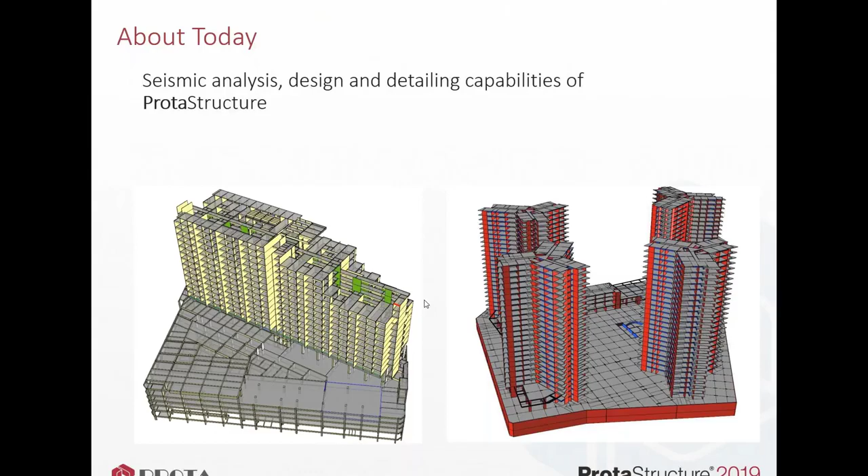First of all, ProtaStructure covers a wide range of international seismic codes. As you know, seismic codes are not only comprised of load calculation, they usually span lots of topics. Of course, the starting point is the load calculation. After you calculate the seismic loads, you have to check irregularities and perform other building checks. After that, you have to design all the members according to the ductility level you assume at the beginning, depending on the structural system. Seismic codes often override the design codes in terms of ductility, detailing, and capacity design requirements. Lastly, since ProtaStructure is a design and detailing software, not just a general analysis package, when you model a structure, the final output is the design calculations and the detailing.

When you model a structure in ProtaStructure, the final output is the design calculations and the detailing. So as part of seismic code support, we also provide ductile and non-ductile detailing. In summary, when we talk about seismic code coverage, we talk about all these chapters in a typical seismic code.

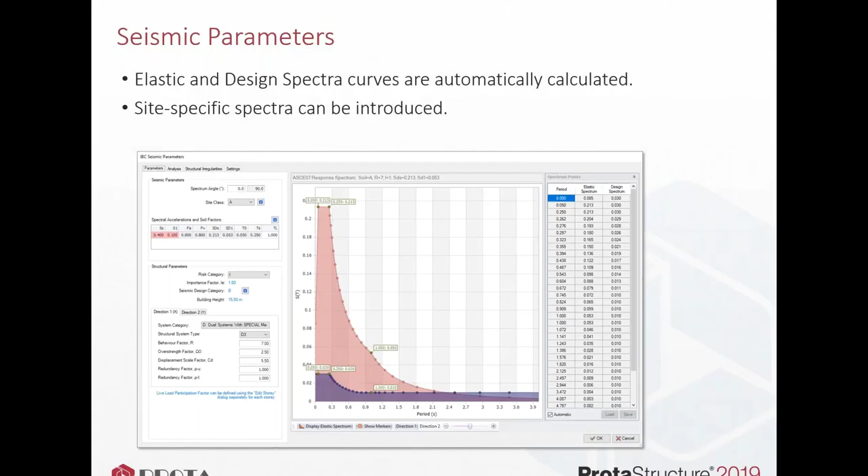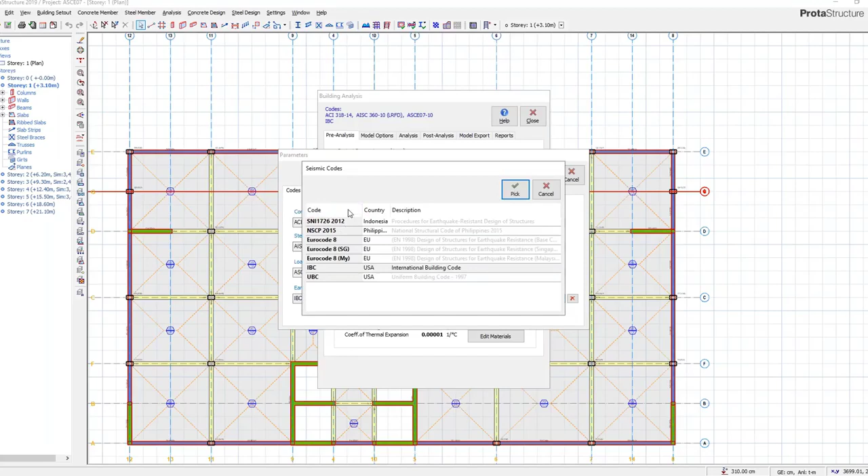Let me show you in the software. So when you go to the project parameters, you can select among various international seismic codes here. If you go to seismic parameters and click on them, this is a parametric view, so you can use the helper tables here. You can select a different site class, and at every change you make here, the spectrum is automatically calculated. So you don't have to do anything except change the parameters depending on your structure site or structural parameters.

Here we have—I will talk about this—ProtaStructure supports behavior factors in two directions. So you can select your structural system differently in two orthogonal directions. For example, in one direction it can be a dual system, and in another direction it can be a moment-resisting frame system. So you will select, for example, concrete special moment frame. The behavior factor in direction 2 will be 8, and in direction 1 it will be 7, with related overstrength factors. This is important for economical design, since sometimes you have different structural systems in two directions, especially in steel buildings.

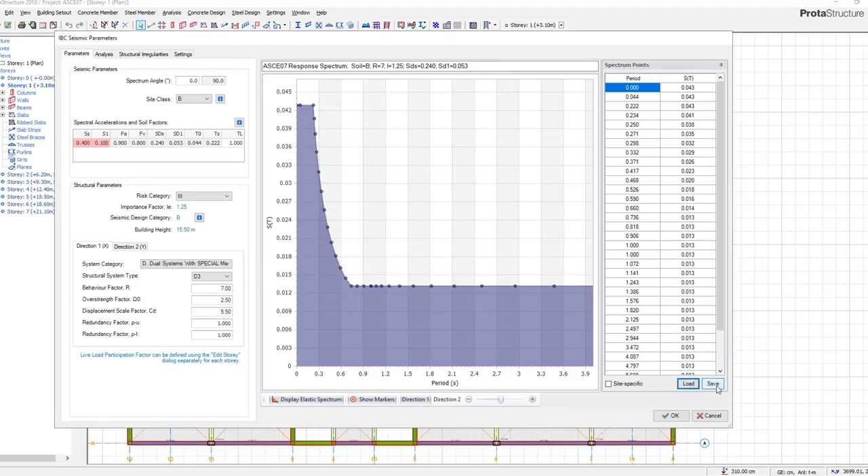Also, another important feature or necessity in load calculation is the site-specific spectra. Usually the code spectrum is sufficient for our load calculation—you see here the elastic spectrum and the reduced design spectrum. But sometimes in projects you need special spectra that are specific to a particular site. If you have such a design spectrum, you can also enter it here. All you have to do is uncheck the automatic checkbox, and if you have a file, select the spectrum file, and then you can introduce the site-specific spectrum.

We have also other options like apply accidental eccentricity. This is all applied by default. Of course, you don't have to change any setting in ProtaStructure for an economical and safe design. But if you want to experiment on these parameters, you can cancel the accidental eccentricity, which is 5% by default. For concrete buildings, the damping ratio is usually 5%.

The number of modes to consider in response spectrum analysis and eigenvalue analysis can be input here. If the number of modes is not sufficient, ProtaStructure will give you a warning that the cumulative mass participation is not enough given the number of modes. So that's all.

There is automation and intelligence here, so you don't miss any important steps.

Also, ProtaStructure is able to check structural irregularities, depending on the selected seismic code - we have several of them. Most important is torsional irregularity, which usually affects the analysis method to be used. As you know, there are basically two methods: equivalent static load calculation, and response spectrum analysis. Depending on the seismic region or spectral acceleration of the site, height of the building, and whether irregularity exists, the seismic codes usually refer us to use response spectrum analysis instead of single mode equivalent static force.

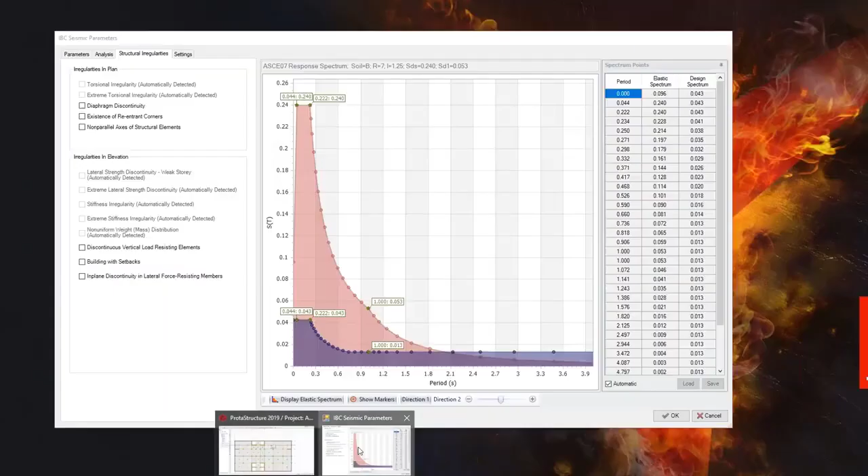Let me show you a little bit about this. Let's cancel it. So what I'm talking about - the mass - here you see the slabs defined, inserted between the beam regions. The first method of load decomposition is the yield line decomposition. By default, all slab loads are decomposed onto beams by yield lines. So if you investigate one of these...

If you use the yield line decomposition, you'll see we have triangular and trapezoidal loads on the beam, automatically transferred from the slabs. We also have the self-weight of the beam, and ProtaStructure will calculate the mass automatically from this load profile, so you don't need to touch anything.

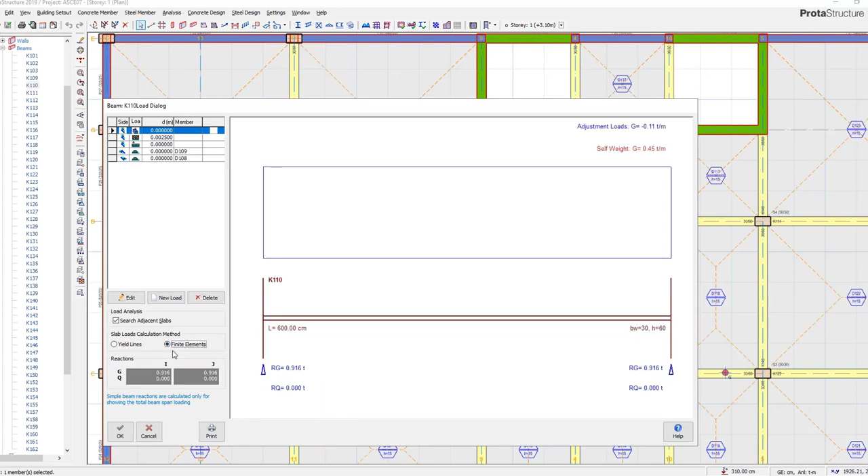The other method of load decomposition is the finite element method. You can isolate a single story of the structure and decompose the slab loads by finite element decomposition. Since I have not done any finite element decomposition here, you don't see any slab loads yet - the default method is yield line decomposition. You may also have line loads or point loads, for example, 2 tons of point load here.

A line load or a patch load, maybe spanning two slabs at once. So all these extra loads are also converted to mass and considered in the seismic analysis.

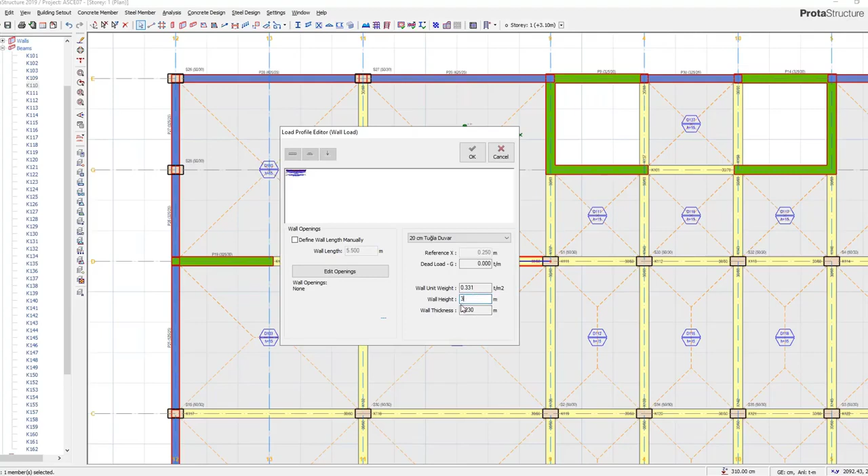Besides, you may have an infill partition wall on the beam. This also creates, let's investigate the member loads. So now we have a wall load here, extra wall load here. All these loads are considered in the mass calculation.

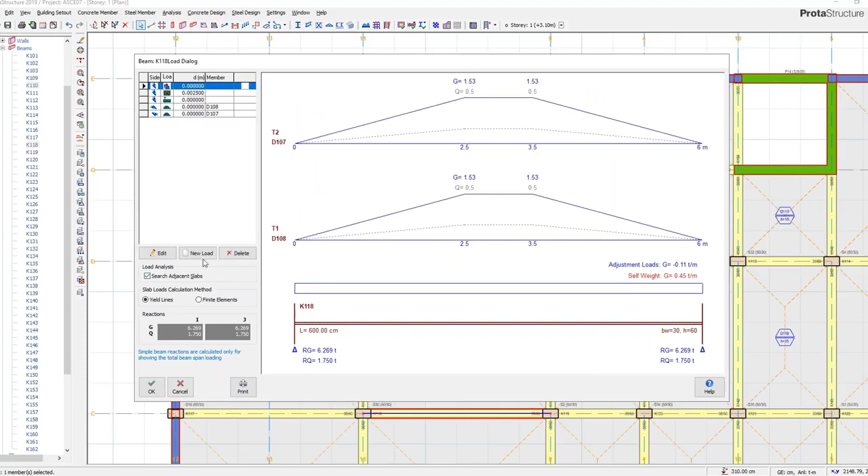Also, you can create new loads on the beam, which we call user-defined loads. Using one of the profiles here, you can create a custom profile. You can enter the dead load and the live load values of this profile, and these are also considered in mass calculation.

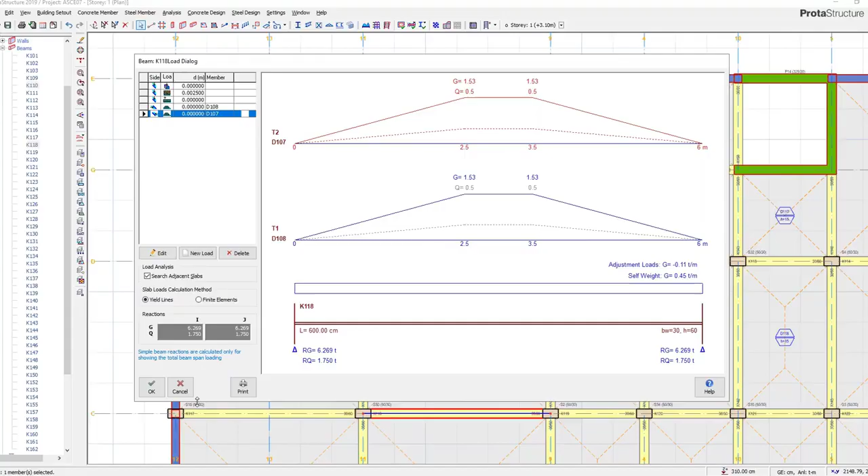Another important topic is the diaphragm modeling and storey meshing. ProtaStructure provides very extensive options for this. The first obvious option is the rigid diaphragm assumption. You can use a single diaphragm or multiple diaphragms on a floor. The powerful feature is that ProtaStructure can automatically decide on the number of diaphragms on a single floor.

ProtaStructure will check the connectivity of the slab members, whether they are touching each other or stepping aside from each other, and can decide on the number of diaphragms on the floor. You can also assume a no rigid diaphragm approach. Even if you have slabs on the floor, you can assume that the building has no rigid diaphragm. That's also possible.

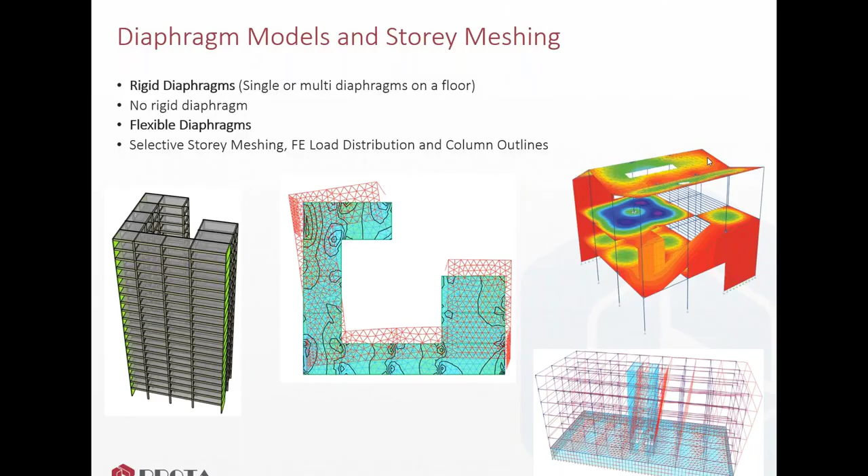ProtaStructure also supports flexible diaphragms. You can mesh stories selectively, use finite element load distribution, and include column outlines in the analysis. So what I mean is, let's go to building analysis.

In the model options, I'm not talking about the Shearwall model yet. In the slab model, we have three options. One of them is the rigid diaphragm, where slabs define a rigid diaphragm. This option will allow ProtaStructure to decide on diaphragms itself, so there's an intelligence behind it.

As I said, looking at the slab connectivities, rigid diaphragms will be created automatically. You can force the system to behave as a rigid diaphragm for each floor, or you can assume there is no rigid diaphragm at floor levels.

These diaphragm models should be considered in conjunction with the finite element mesh, because if you include the slabs in the building model, you can also select which slabs, which floor levels, to be meshed. Usually in seismic codes, you don't need to mesh each and every story, because a frame approach with distributed loads is usually an acceptable approach in design.

But if you have a flat slab, of course, you must mesh all the stories, all the floor levels. But if you have a beam-plate or frame structure, it may be sufficient to mesh only the transfer floors, or the basement floors, or the floors where the structure transitions from a podium to a tower.

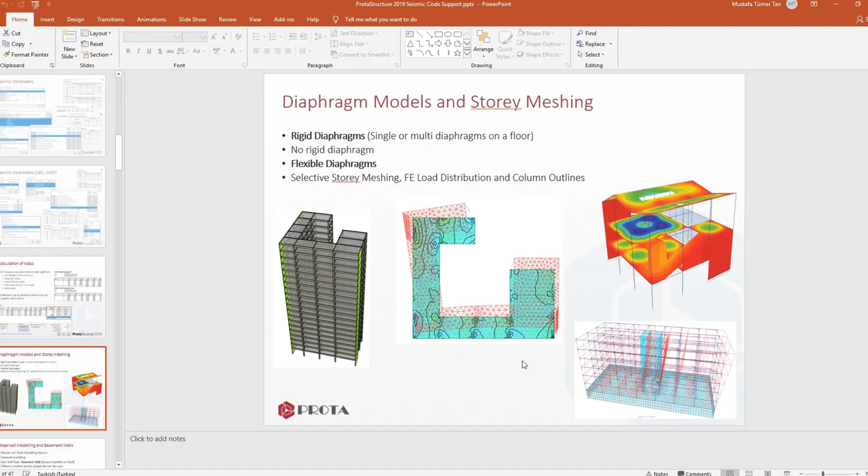With the shear wall modeling, ProtaStructure supports mid-pier and shell modeling options. Both these models have their own merits. For example, mid-pier is a frame approach in which you model the shear wall with a central frame with rigid arms. It brings speed to the analysis, and it will be effective. But shell modeling is, of course, considered the state-of-the-art modeling option for shear walls. Also, we support core wall modeling.

And we have a special wall type called basement wall. The basement walls are always modeled as shell. Also, you can use different crack section properties for walls. In seismic codes, usually different crack section properties are used for different members.

Let me talk about it here. Okay, so mid-pier model - this is the default modeling throughout the structure. So if you select mid-pier model, all of the walls will be modeled with mid-pier. If you select finite element, it will be the default modeling for all the walls in the structure. You can control the mesh sensitivity as well here.

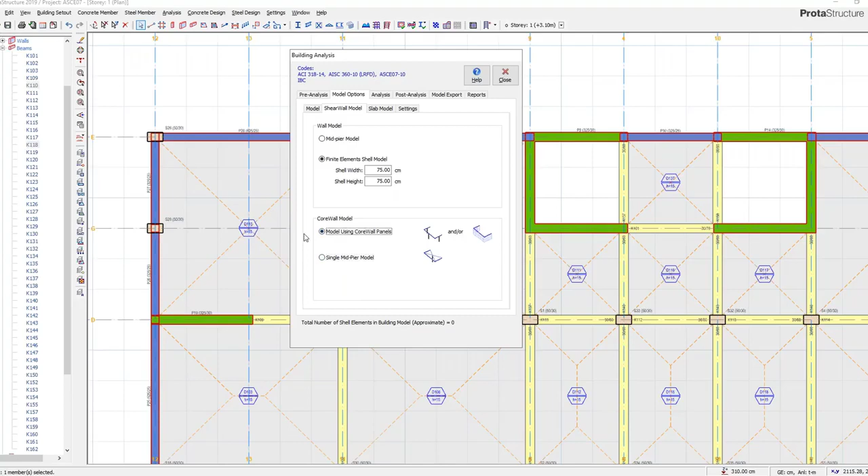Besides, you can also select the wall and change the wall model from default to mid-pier, shell, basement, or retrofit wall for a particular wall member. So it will not be using the default model anymore, but it will use the one you selected. In this example...

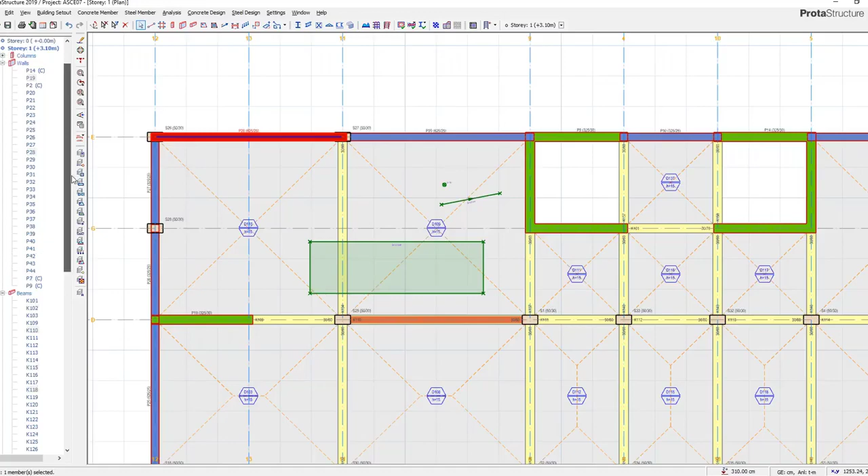Let me check. Okay, if you look at the building in 3D, you can see that some of the walls are blue and some of them are green. That's because we have set these walls as basement wall. Basement walls are always meshed because they are effective under shear more than bending. So because of their aspect ratio, it's better to model these walls with finite element shell members.

But if the aspect ratio of the wall is more than 2, meaning the entire height over the length is more than 2, you can model them as mid-pier elements. It will not change the results too much.

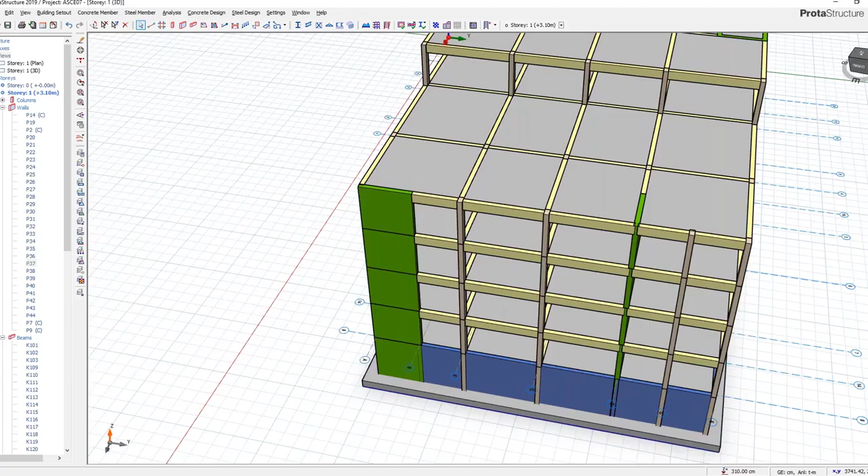But also in ProtaStructure, we have these core wall members. You may select several panels and merge them into a single core wall. Of course, these core walls will have some torsional behavior. It will not be a good idea to model this with mid-pier members, because you may not be able to capture the desired behavior with mid-pier elements, depending on the wall size and complexity. Because mostly these core walls are open sections, and open sections are very weak in torsion, as you know. So the warping and torsional effects can be captured by shell elements more effectively.

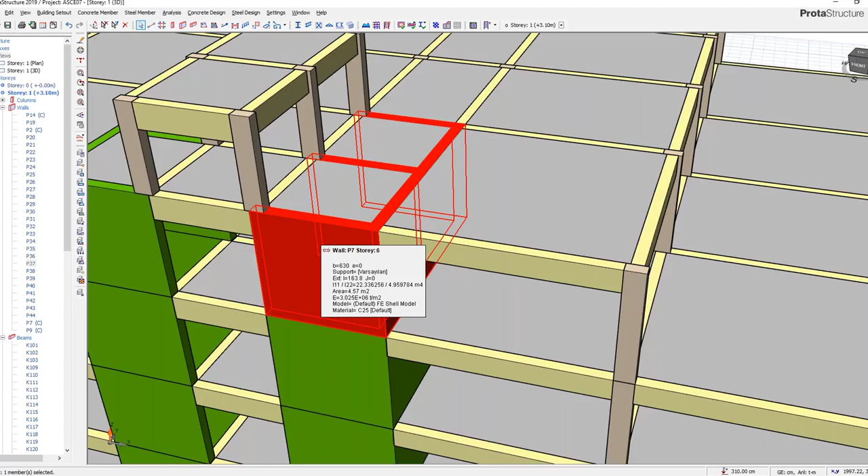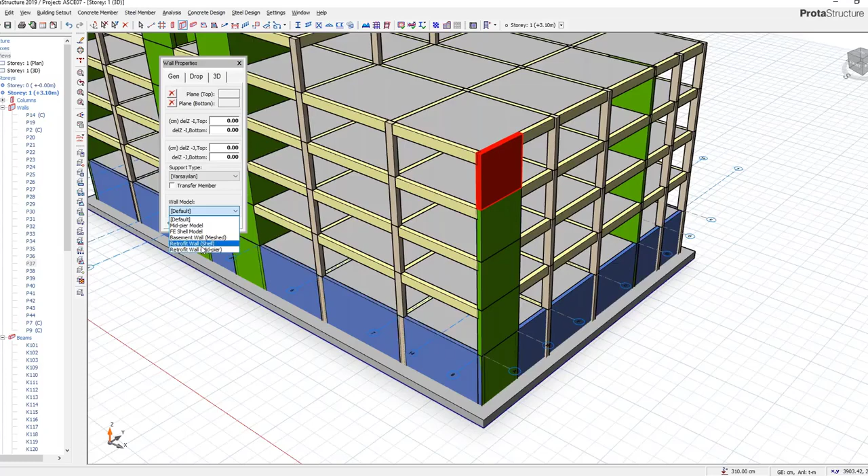There's another wall type I won't talk about too much, the retrofit wall. If you are doing an assessment or retrofitting in ProtaStructure, what you usually do is install infill reinforced concrete frames or shear walls between the existing columns and beams. So you can also denote a wall panel as a retrofit wall. In this case, we will calculate the dowels and other longitudinal bars accordingly.

Anyway, let me do the analysis here. Let me check the parameters quickly - seismic parameters, and model options. I will use the finite element shell model. I'll go with these options. Let's do the analysis.

I'm reading the questions, by the way. The question is, does it mean we can analyze multiple towers in the same model? Yes, you can, because when you separate the floor plans which are not touching each other, ProtaStructure will automatically detect that these are separate diaphragms. So you can analyze multiple towers in the same model.

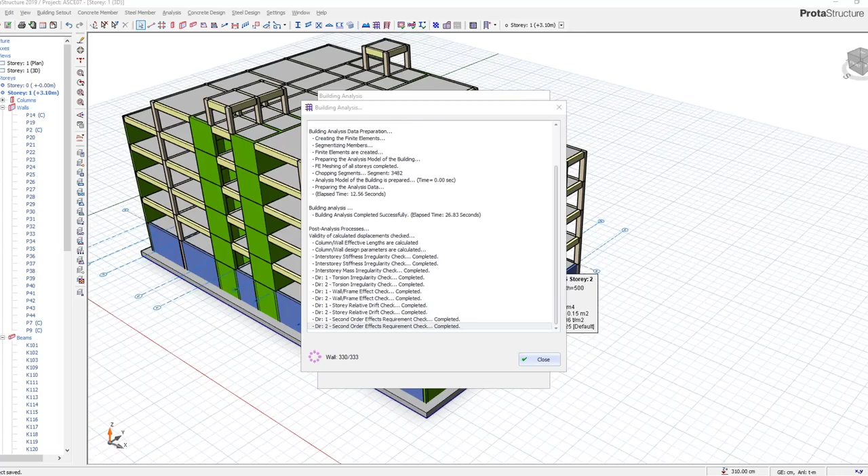Another question: no rigid diaphragm floor means flexible or semi-rigid? It depends on the model you select. If you mesh the slab and select no rigid diaphragm, it will be a flexible diaphragm. But if you don't mesh the slab, then it will be a no rigid diaphragm option.

For crack section properties, can we define a specific member, or is it general to all sections? It's both - you can define the general crack section properties, or you can set it for a member as well.

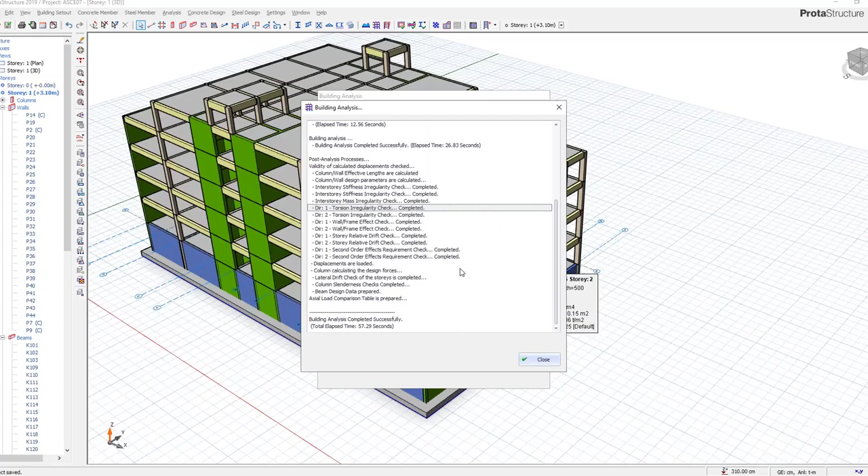Anyway, so what we did here is we completed the analysis. In ProtaStructure, since you are dealing with a physical model, it will convert the physical model automatically into an analytical model and analyze the building under the given assumptions. After this, the building analysis is completed, so now post-analysis processes began. We calculate this, check the irregularities, check the second-order effects, and all the lateral drift checks are done, and the design information is extracted and made ready for design and detailing. It's completed successfully.

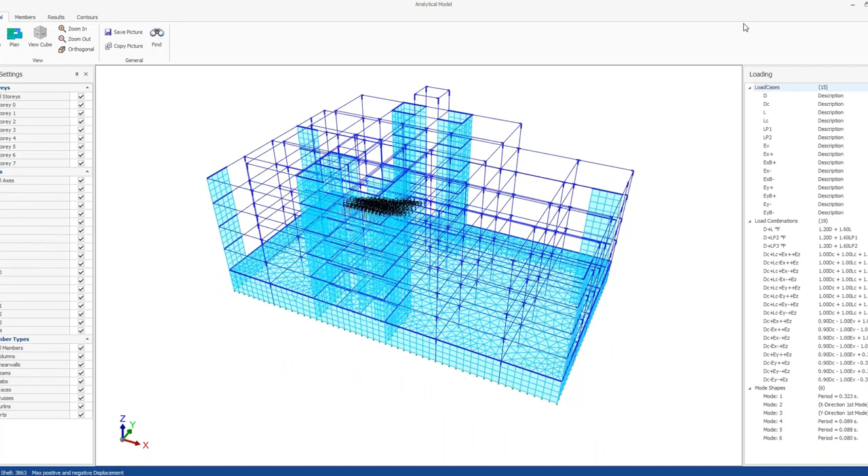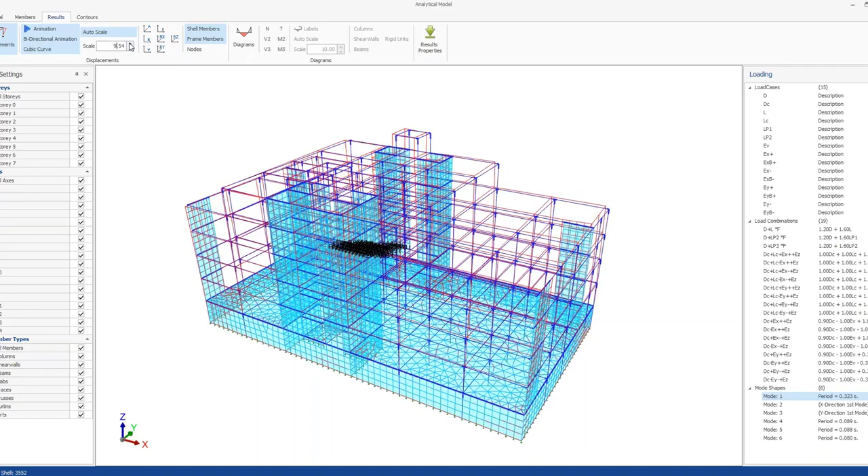So let's check the analysis results. You can see the mode shapes of the building here - if I exaggerate it a little bit more. I think because of the distribution of the shear walls here, the first mode of the building is a torsional mode, which is not very desirable.

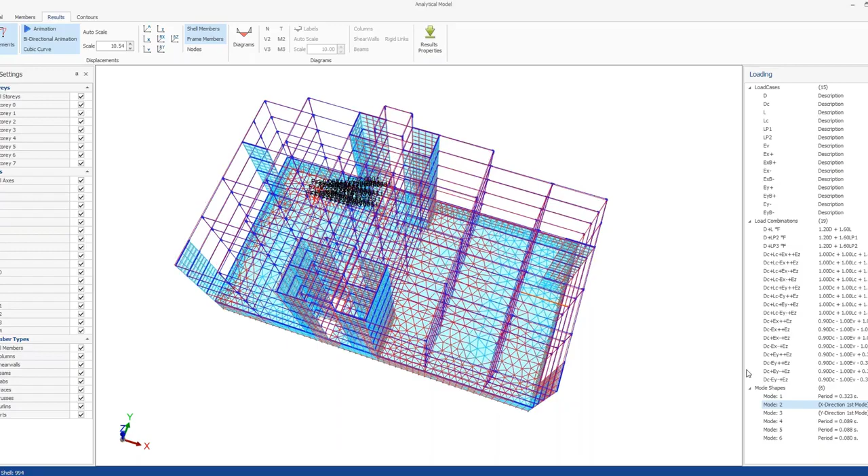But the X and Y translational modes are the second and third modes. Still, they are not ideal because the structural displacement, the modal displacement, also includes a coupling in X and Y - so it's not a pure X or pure Y translation that we observe. Usually you can fine-tune your structural system by checking these mode shapes and whether there is coupling in different directions in the displacement shape.

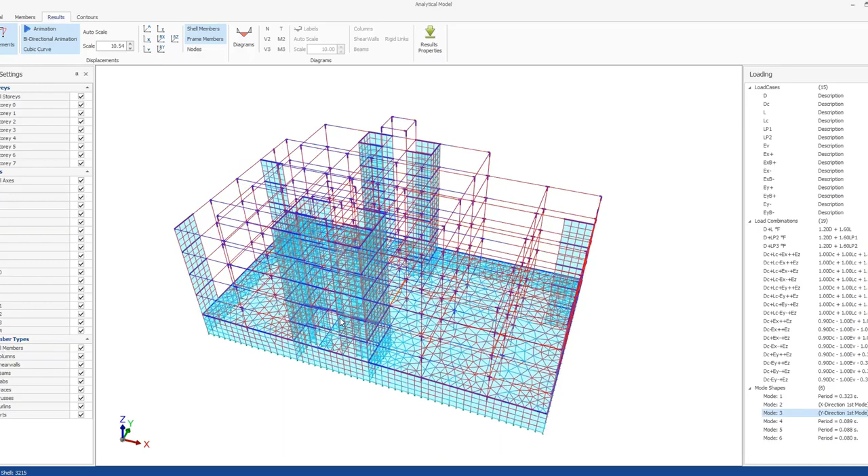I will talk about very interesting things here, but okay, let's check the equivalent static for the upper part of the structure. It's better, I think, for the Y direction.

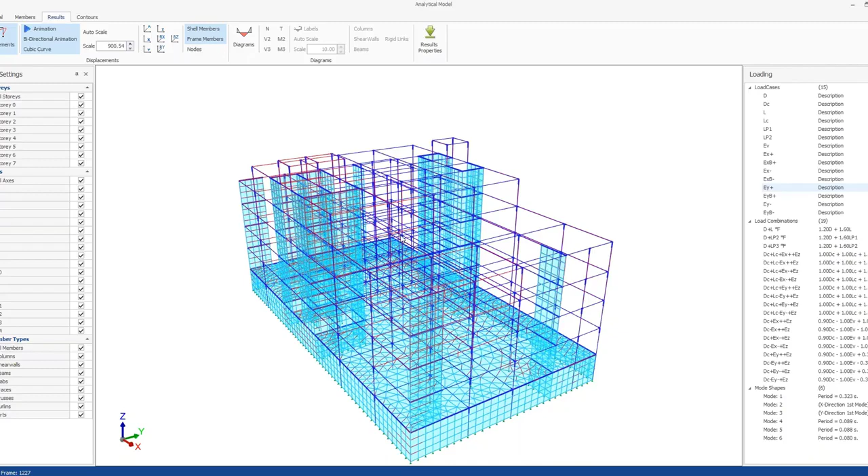Since I have a basement in this structure, ProtaStructure performed a two-stage analysis: first a superstructure analysis with the basement mass set to 0, and then a basement analysis. Let me exaggerate it - as you see, the upper structure is acting like a rigid body, and only the basement floor is deforming. So in the second stage analysis, the loads are applied only to the basement, and the upper structure loads, including lateral loads, are non-existent. ProtaStructure combines these two analyses for buildings with basements.

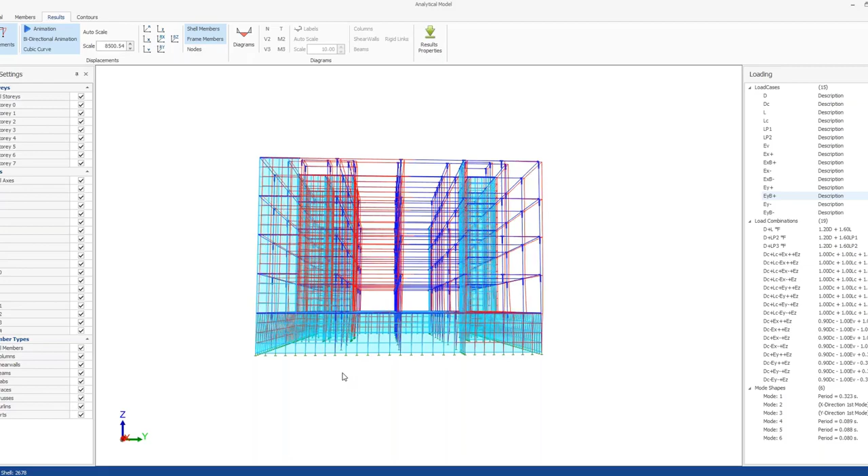As seismic codes recommend, in the vertical direction along the height of the building, basement stories especially have very different stiffness characteristics than the upper stories. So seismic codes suggest analyzing basement levels separately from upper stories, or they recommend a two-stage analysis approach: in one analysis you set the basement masses as 0 and do eigenvalue and equivalent static analysis or mode superposition, then you set the upper story masses as 0 and analyze only the basement, combining the results with redundancy factors or different overstrength factors. This is the approach usually in seismic codes, and ProtaStructure adapts it for structures with basements.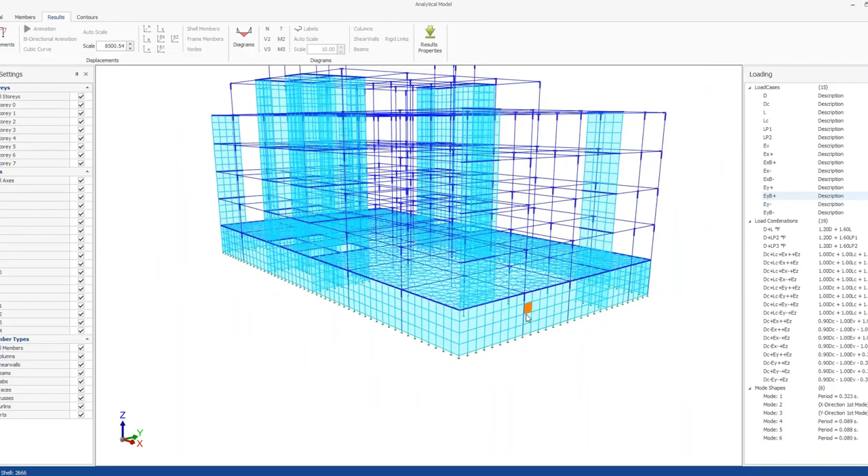Anyway, let's check the model a little bit. As I requested from ProtaStructure, the basement floor is meshed, compatible with the other walls. The basement walls are also meshed, and the other walls are also meshed here since I wanted to use the finite element model. You can see the core walls here as well, which are also meshed with shell elements.

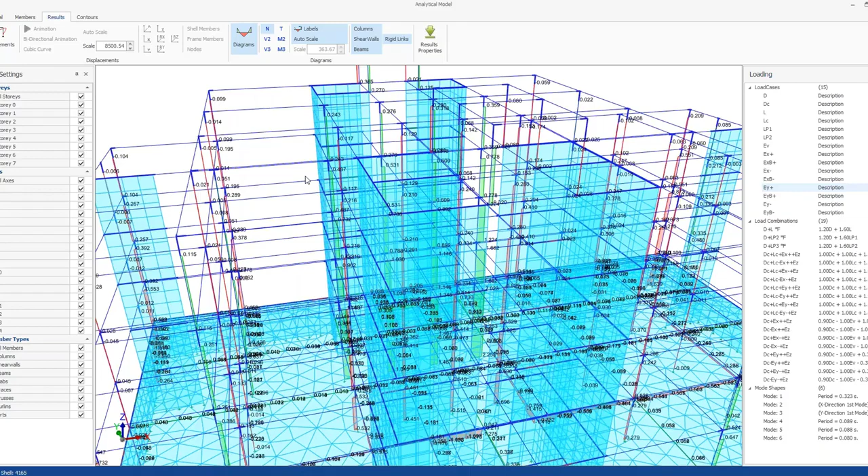So let's check the moment diagrams for... Let's continue with the presentation and try to stick with the flow.

Another important modeling aspect is the wall coupling beams. Usually, walls with coupling beams or without coupling beams have different ductility properties, ductility features, and depending on whether they exist in the structure or not, the selected ductility behavior factor may change. These coupling beams also require additional special detailing, and they have effects on the wall assembly behavior, so seismic codes usually require checking this coupling beam effectiveness.

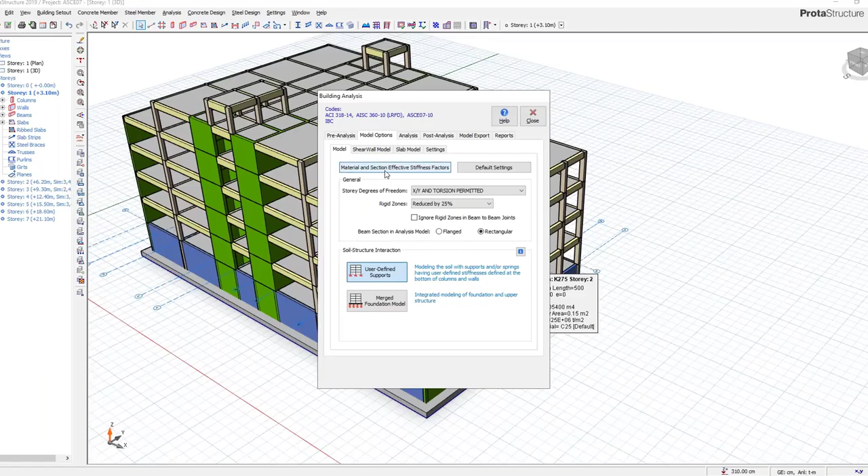Even coupling beams will get a different crack section properties in the analysis. I talk about crack section properties a lot, so let me show it to you. In the model options, we have an effective section stiffness factor table. As you see here, if you are using shear walls with shell members, different crack section properties can be used for each and every degree of freedom or the property. If the shear walls are modeled with frame, you can set different crack section properties. Basement walls, likewise. Slabs, similarly.

So if you see at the bottom, we have coupling beams, which can also have different crack section properties depending on needs. These are granulated in ProtaStructure, and you can control them as you wish here.

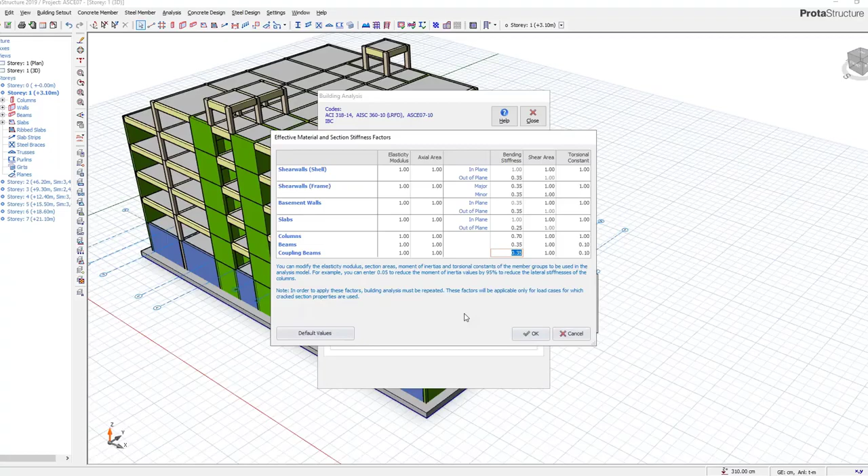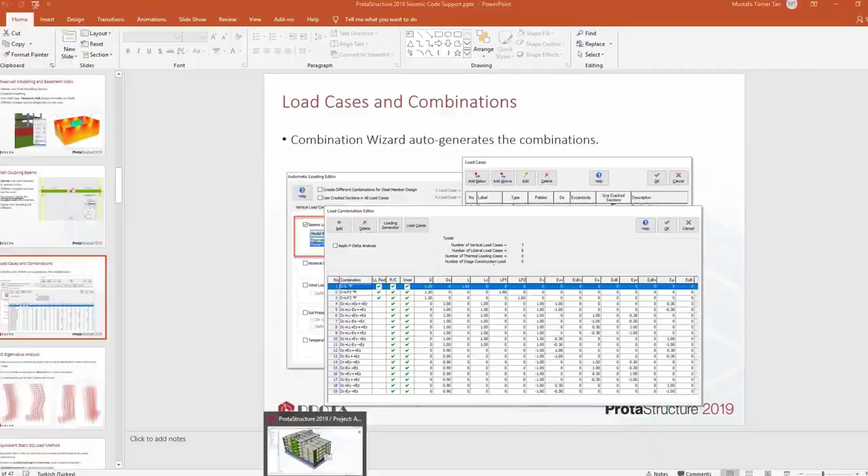Talking about load cases and combinations, we have a loading generator where you can define any vertical loads or pattern loads. I'm not going into detail of it, but for horizontal load combinations, you can use equivalent static loads or modal response spectrum type load cases. We have several options like including 0.9G plus E, which can be critical when the axial loads due to vertical loads are lower. Also, seismic codes require application of 30% of the other direction to the major direction, and this can be considered here.

And lastly, we have an earthquake load you can apply in the structure. It's usually a percentage of the self weight, depending on the design spectral acceleration in a short period, which is SDS. So all these can be applied in the structure.

So if you hit OK, the combination set is automatically created. It will include dead plus live, which are patterns and non-patterns. Also we have crack section - this is important actually, I have to talk about it. So D means uncracked, DC means cracked; L means uncracked, LC means cracked.

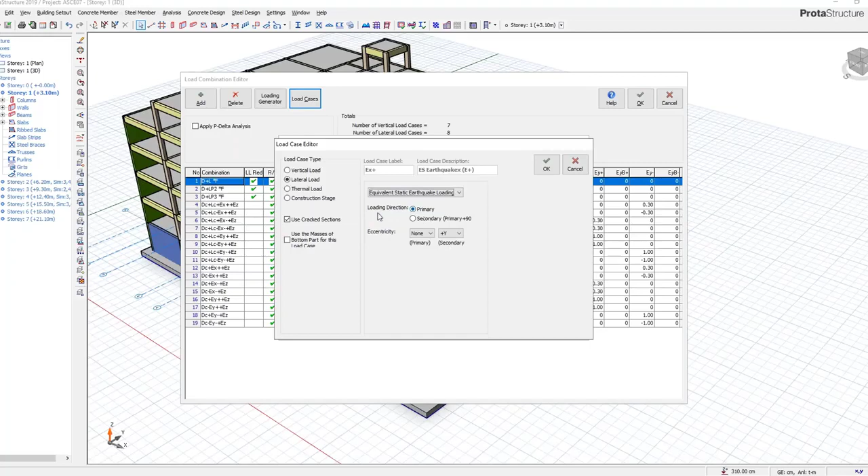If you take a look at the load cases, these are also automatically created. Let's double click and check one of them - it's a lateral load with equivalent static feature, a load case in the primary direction with eccentricity in the secondary direction. All these accidental eccentricities are automatically included in the combinations. Another important thing: the 8th load case is EX plus, meaning it acts in the X direction and rotates the floor plan clockwise. The 10th load case is EX minus, still acting in positive X direction, but rotating the floor plan counterclockwise. These can create different critical effects in the design.

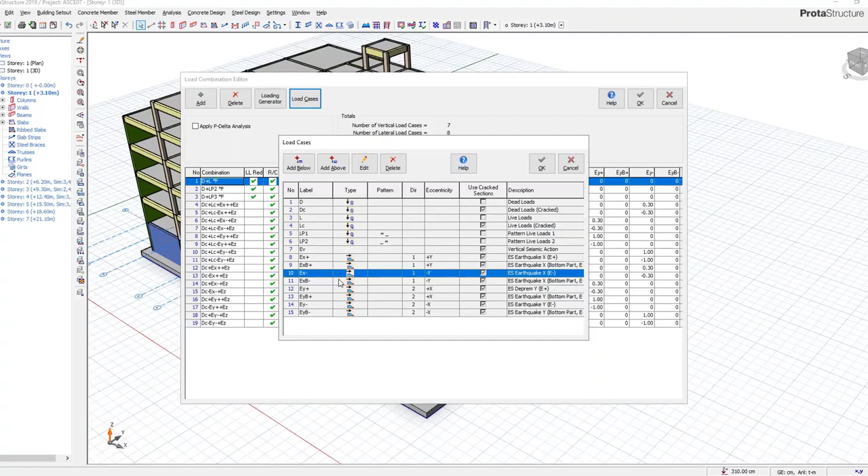So these are also automatically taken into consideration by ProtaStructure. At the end of the day, if you look at the combinations - dead plus self dead load, live load plus EX plus, dead load, live load minus EX plus - all these load cases are combined so that the symmetrical and critical values are attained for the design. This is a really important topic; even with an operation as simple as load combination, there are lots of details when you start talking about seismic design.

So I think I mentioned about the eigenvalue analysis. The eigenvalue analysis is done automatically, including the torsional modes and inertial masses, and ProtaStructure determines the dominant mode automatically from the mass participation. We also utilize the cracked sections in the eigenvalue analysis.

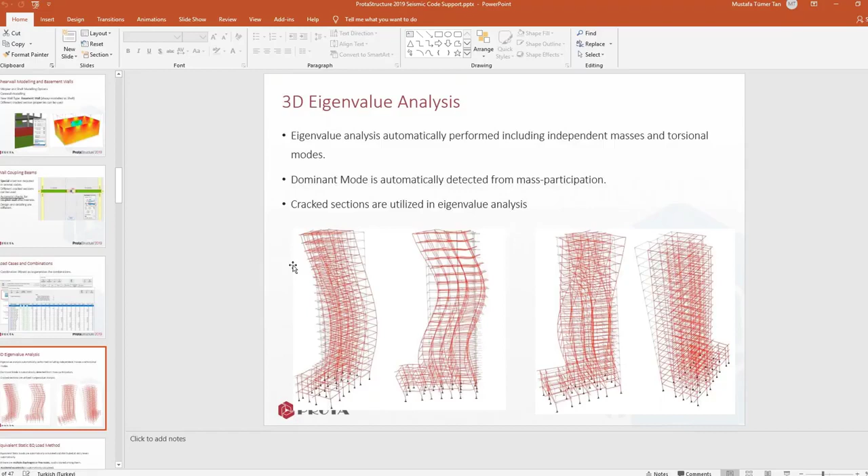The equivalent static load method is also inside the software. These loads are automatically calculated and distributed at storey levels.

As I mentioned, we may have multiple diaphragms or free nodes. If this is the case, the storey shear is distributed among them. So if a floor has multiple diaphragms as well as free nodes, a mixture of them, the total storey shear is shared among them.

Also, accidental eccentricity is automatically calculated and applied, and irregularity penalties are automatically applied. What is the irregularity penalty? For example, if you have a torsional irregularity, the penalty is to increase the accidental eccentricity. So if it is 5%, the penalty increases it to 6%, for example. In that case, ProtaStructure will repeat the analysis automatically with the increased eccentricities and give you the results.

Since equivalent static method is an approximate method dependent on the first mode, it will have penalties if there are irregularities in the building.

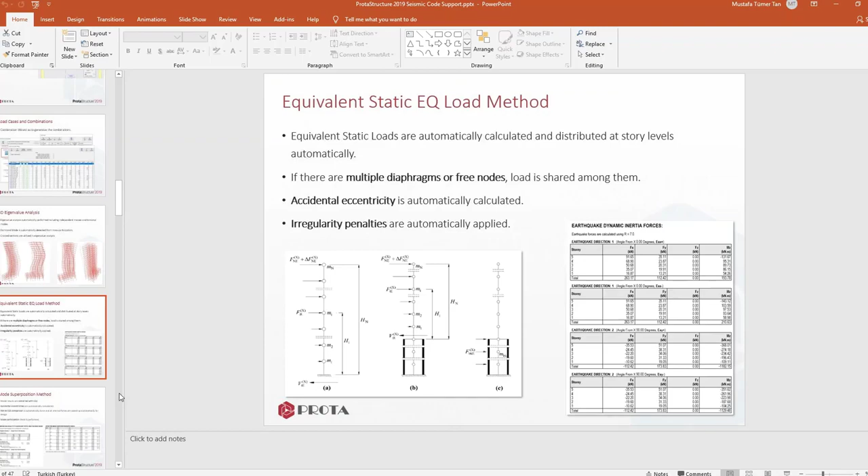Regarding the mode superposition method, you can use the RSA, response spectrum analysis, where equivalent static loads are not applicable. We combine the modal results with CQC, and we apply the accidental eccentricities automatically again.

The important thing is mode superposition method requires comparison of results to equivalent static. Seismic codes do not allow using mode superposition alone; you have to upscale the results from RSA to equivalent static. This is done automatically for all the drifts and internal forces.

Another important check for mode superposition is the mode participation. Depending on the seismic code selected, the cumulative mass participation should exceed 90%, 95%, or even 100% in some cases. But attaining 100% participation is not attainable using a limited number of modes, so the mode participation is also checked automatically.

Here in the screen you see some screenshots from the software.

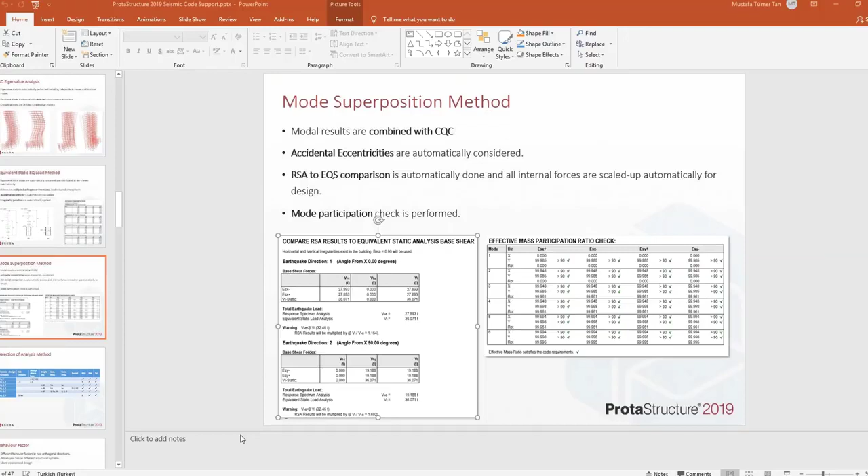This slide is about the analysis method. If the selected analysis method is not applicable for your building, ProtaStructure will warn you. It may depend on different parameters like seismic design category or risk category, stories above base, height of the structure, whether irregularities exist or not, whether the period of the structure exceeds some limit or not. All these analysis method checks are done automatically in ProtaStructure, and if your selected method is not applicable, it will warn you about it.

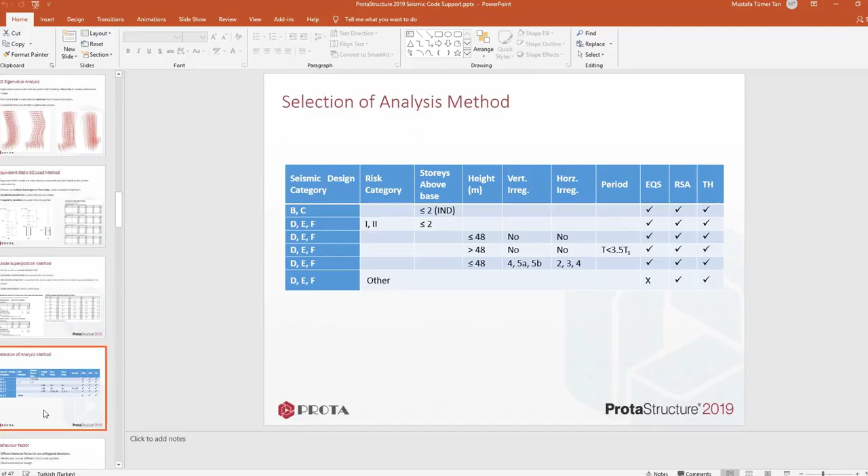I also talked about the behavior factor. You can use different behavior factors in two orthogonal directions. I will not talk about it in detail since I already showed it to you.

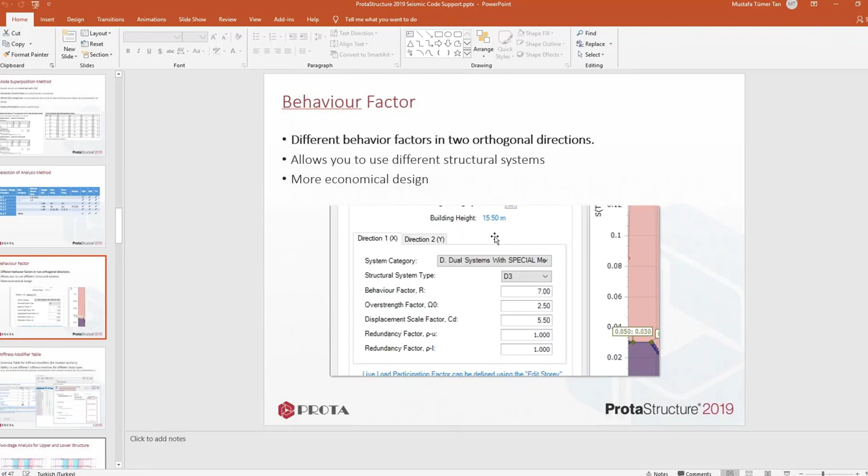I talked about the stiffness modifier table. As I said, you can control the crack section properties very extensively using this modifier table. Also important is the ability to use different stiffness matrices for different load cases - so uncracked sections for gravity combinations and cracked sections for earthquake combinations. These are all possible.

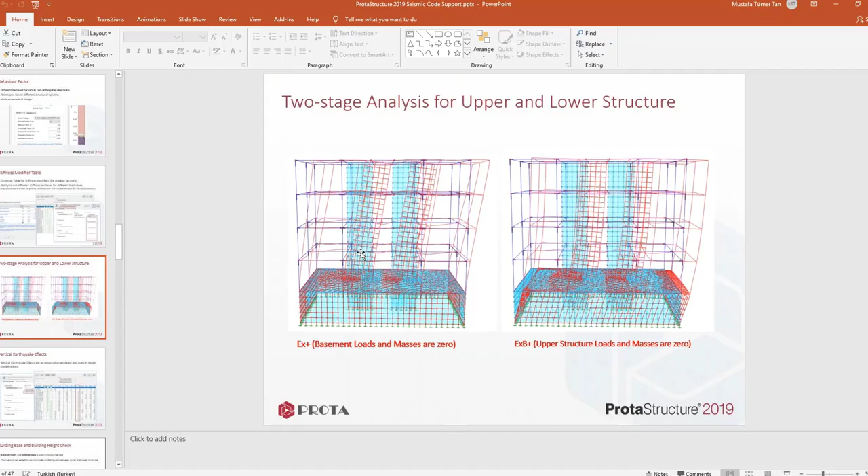I talked about two-stage analysis. If you have a basement structure, the two-stage analysis is automatically done by ProtaStructure.

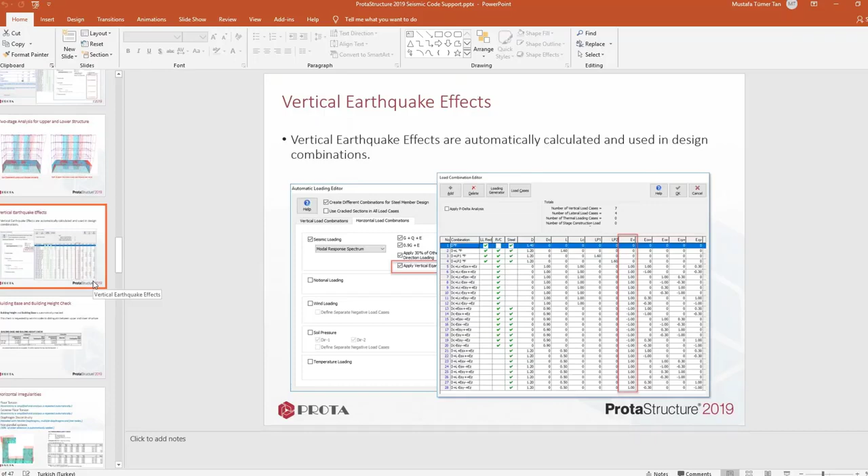I also talked about vertical earthquake effects - we can pass this quickly. Another important check is the building base and building height check.

Let's switch back to ProtaStructure here. When you start the modeling in ProtaStructure, you usually go to the Edit Story dialog. So let's say I have one rigid basement here - number of rigid basements is 1 in this example, and the effective top story is 6.

Since I have some elevator floors here, I don't want to consider them in irregularity checks, and I don't want to apply the top roof load to these stories, but they are still in the analysis model - they are not excluded. Their stiffness and mass contribution is not excluded, but they are excluded from the irregularity checks, and in the equivalent static load method the roof load is not applied to this story level.

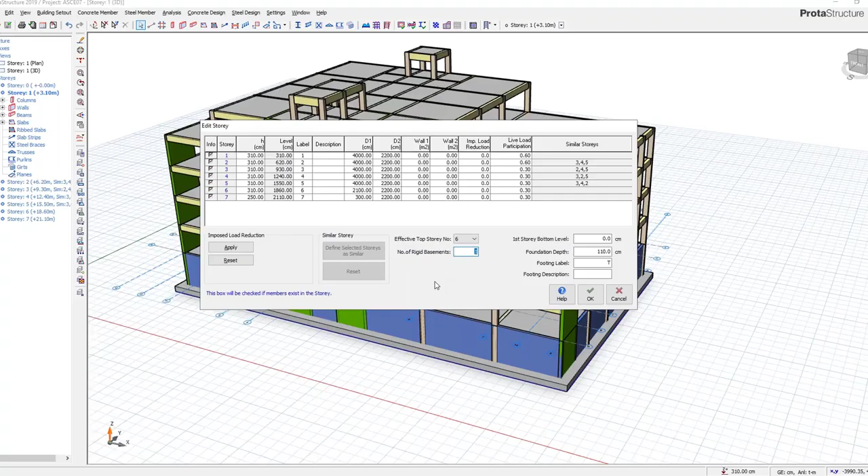So when you start the design, you usually start by setting the story properties. In this example I have one rigid basement, but according to seismic codes it's not sufficient to just say that - you have to satisfy certain criteria, for example the period of the entire building with basements over the first period of the upper stories only should satisfy certain ratios.

If the criteria is not met, that means you cannot assume that you have a rigid basement. In order to assume a rigid basement in your structure, you really must have rigid walls around the basement level. If you don't have any walls, you cannot say that you have a rigid basement, or if the periods don't satisfy the given code criteria, you cannot say that you have a basement.

So ProtaStructure decides whether the building base or the basement number is acceptable or not. This is a very important check, which is usually overlooked by engineers and other software.

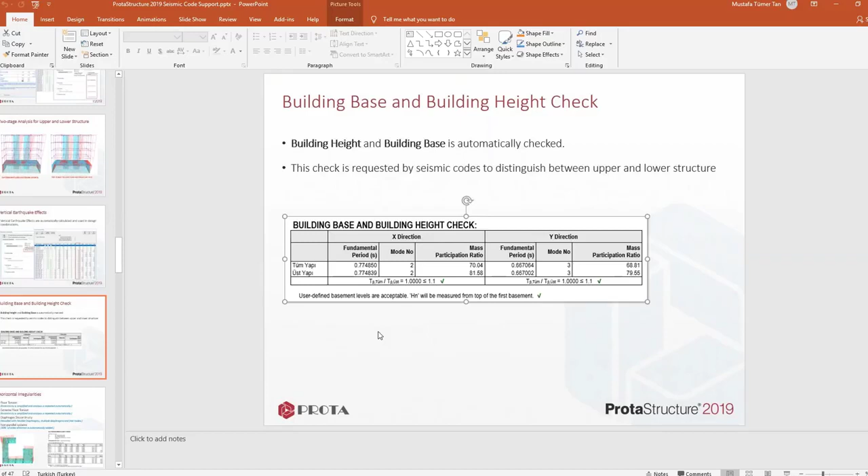What we check, I mentioned about these irregularities at the beginning of the presentation. We check floor torsion. The penalty for floor torsion is amplification of the eccentricity, additional eccentricity, and repetition of the analysis automatically. So you don't have to do any analysis by yourself. ProtaStructure will take care of it.

Another irregularity is extreme floor torsion. Again, the eccentricity is amplified. These two also affect the selection of analysis method.

You may have diaphragm discontinuity. You can handle diaphragm discontinuity by using flexible diaphragms, multiple diaphragms, and free nodes. You have these modeling tools at your disposal to consider diaphragm discontinuity.

Also, if you have non-parallel systems, non-orthogonal systems, the penalty for it is usually the addition of 30% of the other direction to the major direction. So this is also achieved automatically by ProtaStructure.

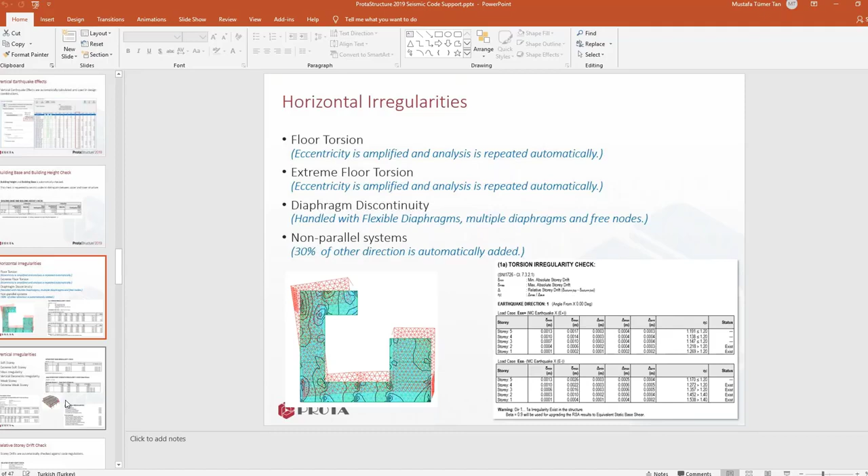Regarding the vertical irregularities, ProtaStructure checks soft story, extreme soft story, or mass irregularities, vertical geometric irregularities, weak story, or extreme weak story. These are also important, and they also affect analysis method selection.

These are all in the software. You can go to the post-analysis reports and take a look at the tables, which are also included here as screenshots.

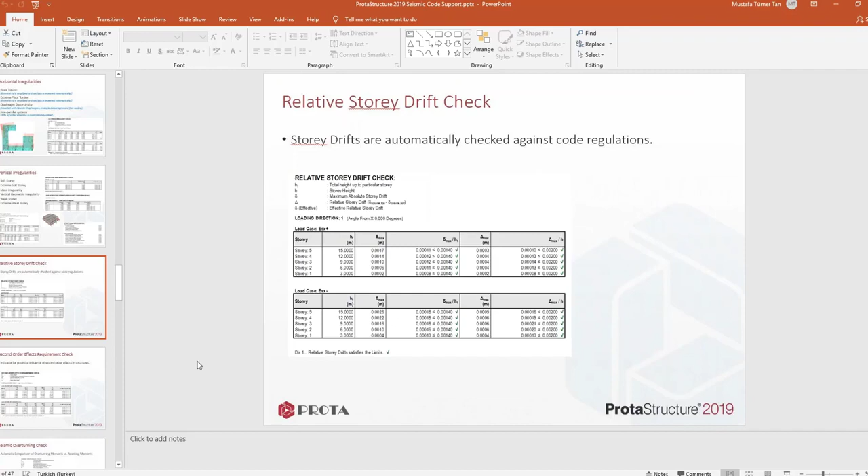A relative story drift check is very, very important, because even if you satisfy the strength and ductility criteria in your building, story drifts can exceed the allowable limits in the code. So these are also checked against the code regulations and tabulated for you. This is a very important check as well, which must be done.

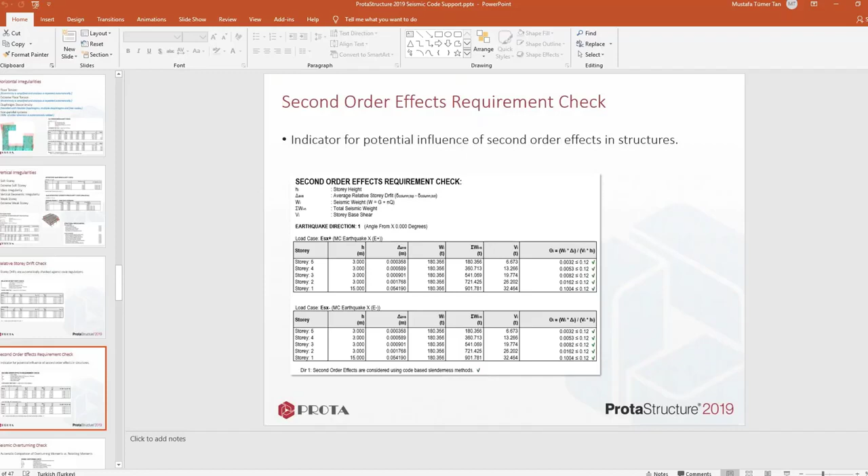A simple stability check is a seismic overturning check. It compares the overturning moments versus resisting moments. This is particularly useful for narrow buildings, or if you are designing towers, you may take a look at this overturning check. Of course, it has to satisfy some certain safety factors.

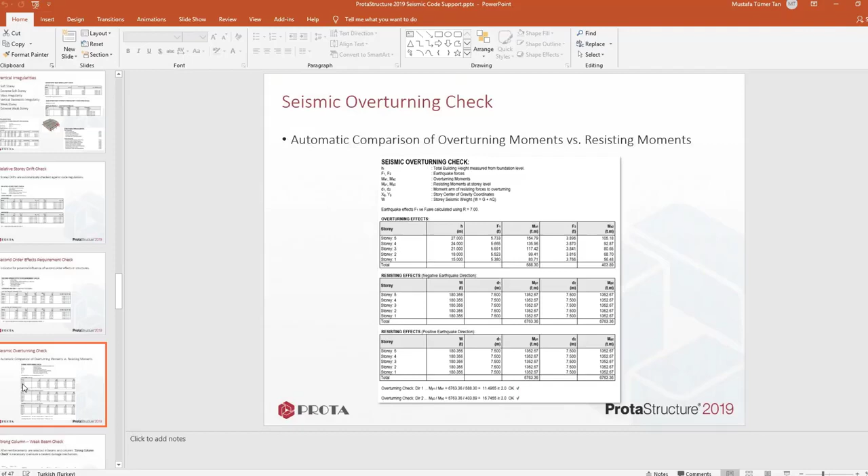A very important check is the strong column and weak beam check. If you are doing a special frame design, you have to satisfy the strong column, weak beam philosophy. What we do is we calculate the capacities of the columns, and we calculate the capacities of the beams, and when you divide them by each other, you get an indicator which should exceed some certain value depending on the code. So this is an important check which should be done.

Also, joint shear check is done automatically. For the strong column check, usually it's sufficient to satisfy 70% of columns in one story. You don't have to satisfy the strong column rule for each and every column at a story level. The 70% is usually sufficient.

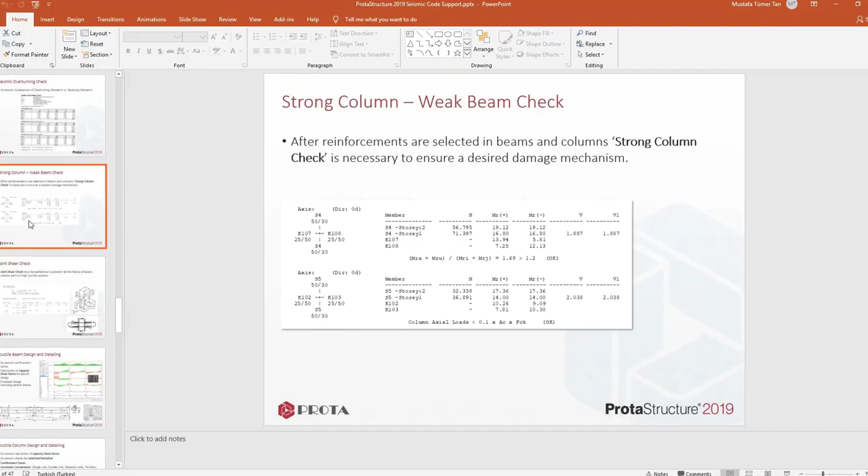But for joint shear check, since this is a check that prevents the brittle failure of joints, each and every joint must be satisfying this shear strength condition in this case.

Also, joints are automatically classified as type 1 or type 2 joints, which are confined joints or unconfined joints. If there are 4 beams framing into the column at 4 sides, and their perimeters are more than 75% of the perimeter of the column, then it is a type 1 joint. If it is an exterior joint, then it's a type 2 joint. So this check is done automatically.

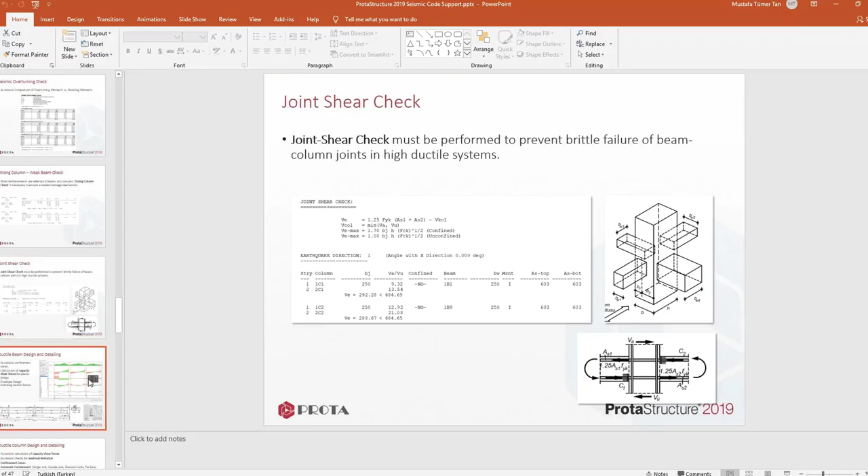So after these structural checks, we go into ductile checks like ductile beam design. What we do is, first of all, including all the seismic combinations, we create the envelope diagram, including the gravity combinations and seismic combinations. We have the envelope diagram, and depending on this envelope diagram, we calculate the longitudinal bars. And of course, all the seismic code provisions are applied on the amount of longitudinal required area.

But shear design is another very important thing in the seismic codes. So we don't design according to the shear diagram we have at the end of the analysis. We have to go for the capacity shear, especially for the high ductile beams.

So what we do is we calculate the capacity shear, which is the ultimate shear that will affect if both ends of the beam are yielded. So we calculate this capacity shear using the formula given in the seismic code, and we calculate the amount of links using these capacity shear values.

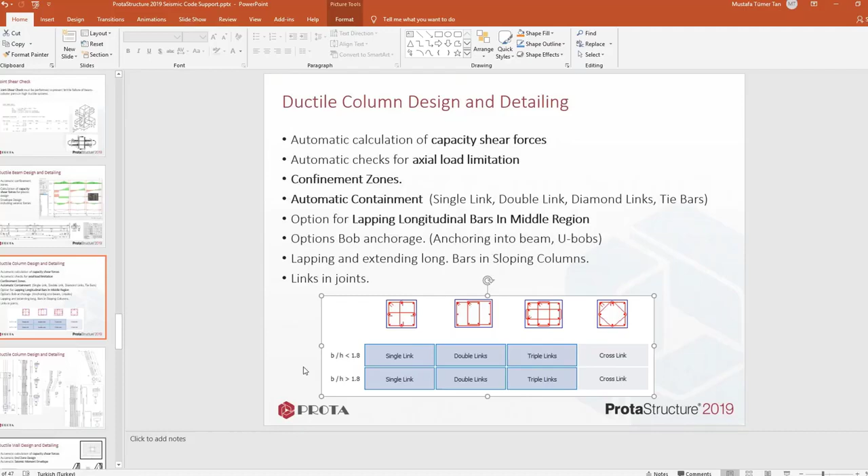I will show it in the next slide. So for ductile column design and detailing, one option is to create the lap splices in the middle region of the column. There are two options in ProtaStructure: you can splice the longitudinal bars at the storey level, or you can splice the bars in the mid region, depending on your choice of practice and the seismic code requirements.

Also, you may have a narrowing column. If you look at the section of the column in the upper stories, the column may be narrowing down. There are certain criteria that should be met when the longitudinal bar from the bottom story goes into the upper column, so this inclination must satisfy certain conditions. Usually the inclination is 1 to 6. If the 1 to 6 criteria is not satisfied, the longitudinal bar is simply left as it is, or bobbed into the beam.

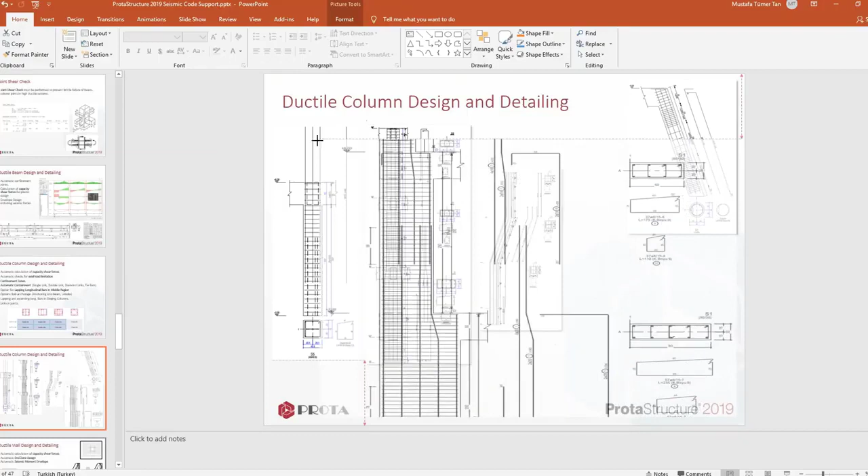You may have inclined sloping columns, and again these are also detailed, as you see here more closely. Let's make it bigger. Here, this bar automatically goes into the upper column, and the lap splices are in the middle. But this bar here is not satisfying the inclination ratio, so it's left as it is.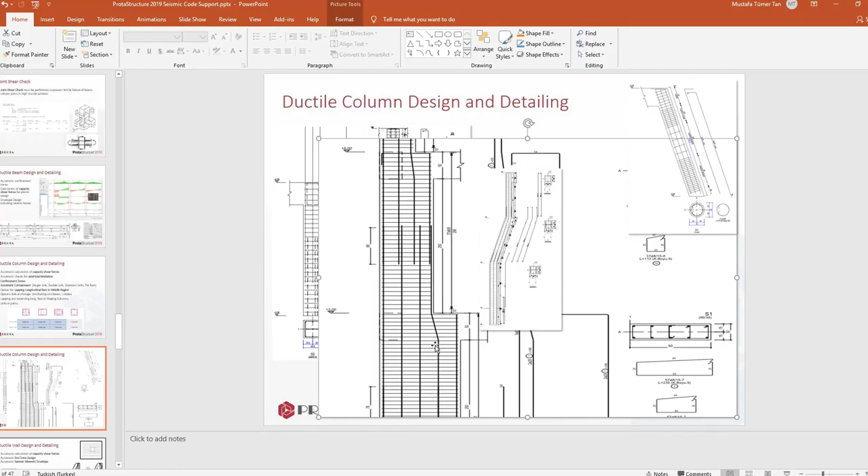Another important topic in design is ductile wall design. First of all, shear walls must also satisfy the capacity shear design, so we don't usually use the analysis shears. We calculate the capacity shear forces. Another important thing in wall design is the design of end zones, which is done automatically in ProtaStructure.

Usually the idea is, from a certain distance from the bottom to top, some of the stories, usually it is the height 6 times the length of the wall, or the total height divided by 6. There are certain criteria for the critical wall height. If the wall is within that critical wall height, then the end zones are larger, determined automatically by ProtaStructure. If the wall is outside the critical region, the end zones will be narrower. Also, if the shear wall is narrowing down more than 20% of the length, the critical height should start over again, and larger end zones must be used in that case.

Again, all these details are done automatically in ProtaStructure. Another important concept is the moment envelope for the shear walls. For the moment flexural design, we don't use the analysis moments for the shear walls. What we have to do is assume a constant moment within the critical height, draw an envelope to the top, and use that envelope in the moment design. That's an important thing to consider.

Also, we support different detailing options for shear walls. As you see here in the shear wall section, we support options for the web bar to go into the end zone, inside the end zone, and make a hook there. We also have options for the web bar to continue outside the end zone or inside the end zone. These are all different options for wall detailing already inside the software. Some of these details might be preferred because of effective confinement.

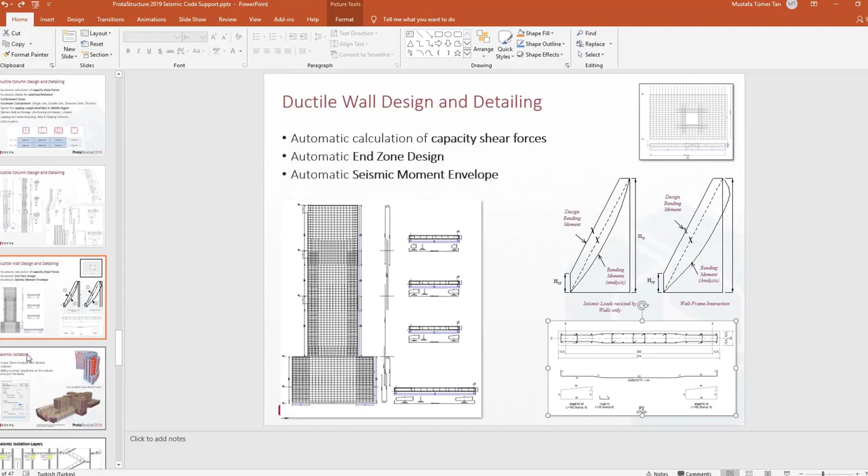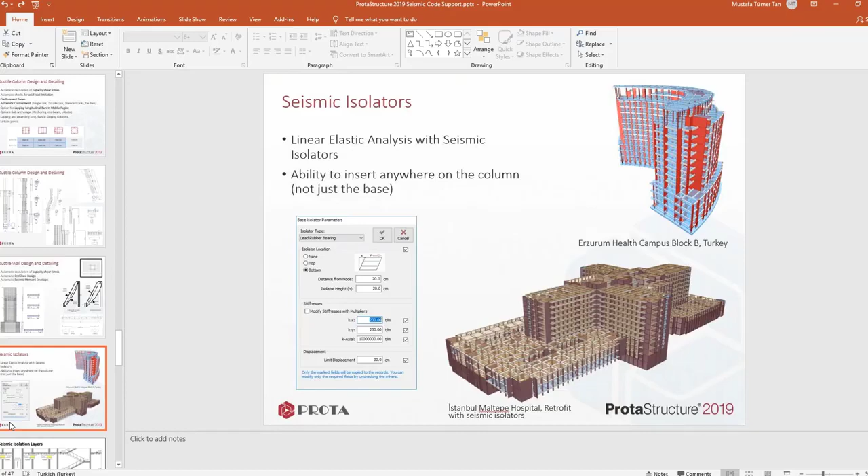Another topic is seismic isolators. You can model seismic isolators in ProtaStructure. Currently they are linear elastic springs, and we perform linear elastic analysis with the isolators. After you do the initial isolator design, you decide on the stiffness of the isolators, or the effective equivalent stiffness, and you can introduce them to ProtaStructure to perform the design of the upper structure under elastic loads. This is also possible in ProtaStructure. You can choose among lead rubber bearing, friction pendulum.

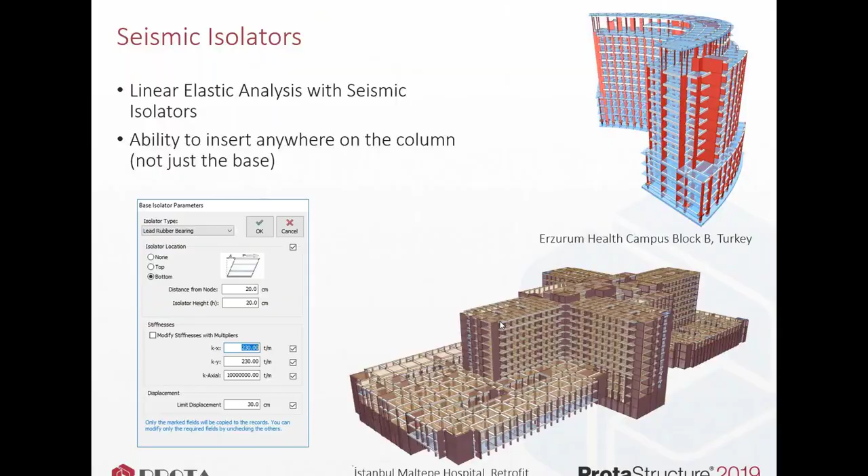And you can insert these isolators anywhere on the building. For example, one of the projects we did with ProtaStructure, some of the isolators were at the bottom of the building for isolating the elevator shafts and the stair shafts, but other isolators were at the top of the basement because we had some car park facilities. So we had to isolate different levels of the building.

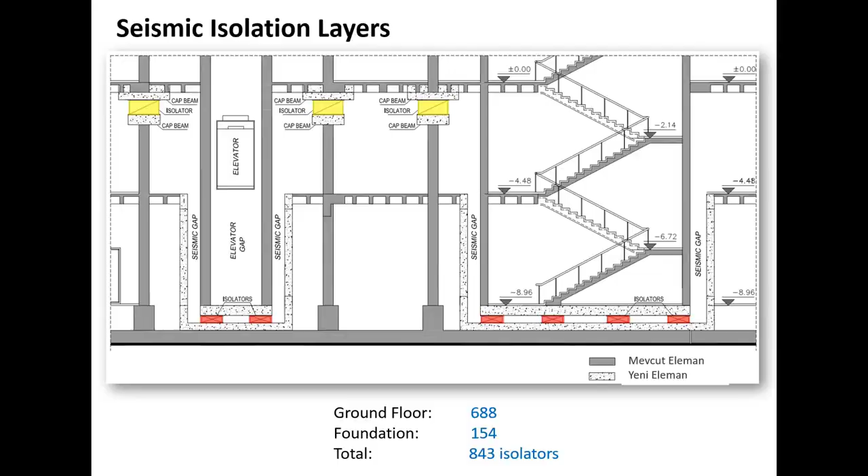So let's talk about assessment and retrofit a little bit. ProtaStructure supports different methods for assessment of existing buildings. One of them is displacement-based linear elastic methods, single mode static pushover, risk assessment, and nonlinear time history analysis. Among these, the risk assessment is a special analysis. It's again a displacement-based linear method, but the performance level of the risk assessment is between life safety and collapse prevention. So it provides a quick way of deciding whether the building is really risky or not.

So after this risk assessment, the demolition or retrofit decision will be made. Also in ProtaStructure, we support some retrofit techniques like column jacketing, in-frame RC walls, and steel braces.

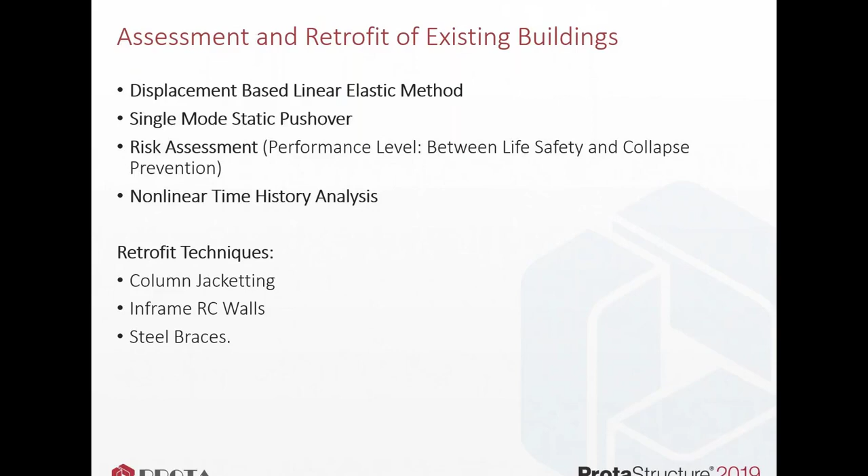There are some powerful features here. So when you assess the buildings, what you usually do is you go into the building physically and you take measurements. You just have an understanding of the existing state of the building by taking measurements, by taking samples from the concrete, by breaking out some concrete covers and looking at the existing bars, corrosion levels, etc.

So first of all, you have to collect information from the buildings first. That means if you have the blueprints for the building, you may have the exact reinforcements in the project, or you will have the estimated reinforcements.

If you have the blueprints, you can enter the rebars one by one to the columns in ProtaStructure, and then when you go to the existing building on the site, you may realize that actually the rebars in the blueprints are not matching with the existing state. So you can just use the rebar realization factor. For example, you have some rebars on the blueprint, but only 80% of it is used in the project, in the application, or the building may be suffering from corrosion. So you can also enter the amount of corrosion in the building in ProtaStructure.

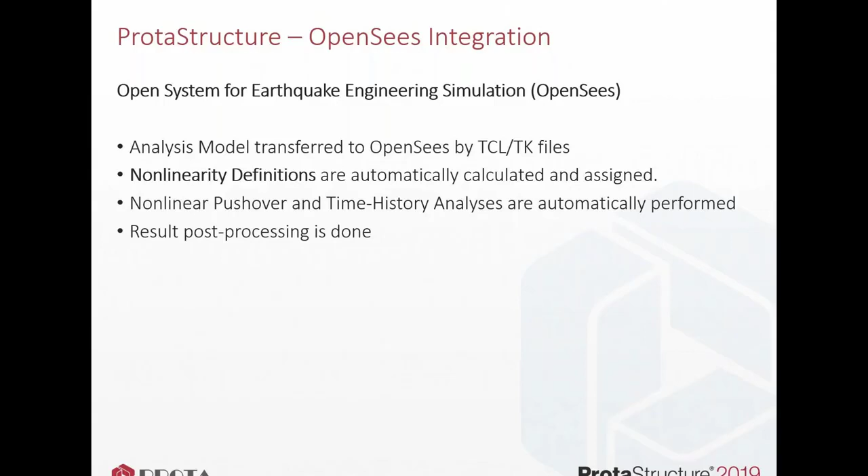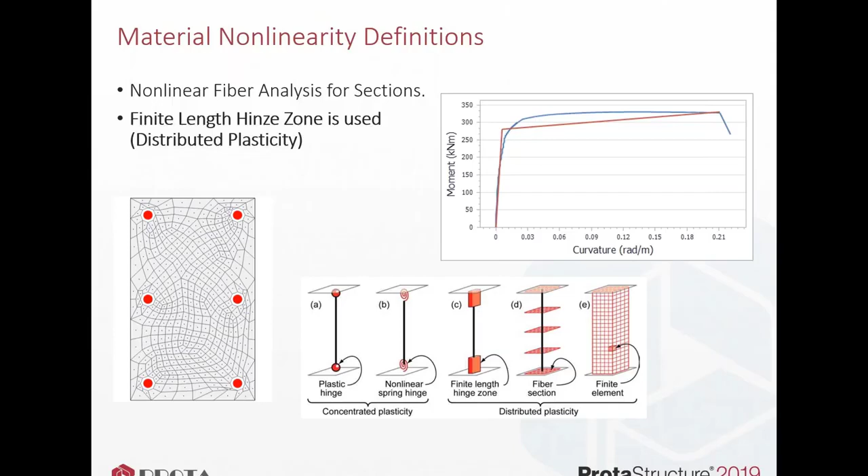For pushover analysis, you can specify the monitored node. You may be doing this pushover analysis for the entire structure and monitor the top nodes, or you may be performing a storey pushover, monitoring a node at a storey, usually the diaphragm master joint for the top storey or any storey you like.

You can control the target displacement and iteration parameters in a very detailed manner. At the end of the analysis, we have a pushover curve and a detailed assessment report. What we usually do is calculate plastic rotations, and yield rotations are also known, so we compare these rotations with the rotation limits given in the code.

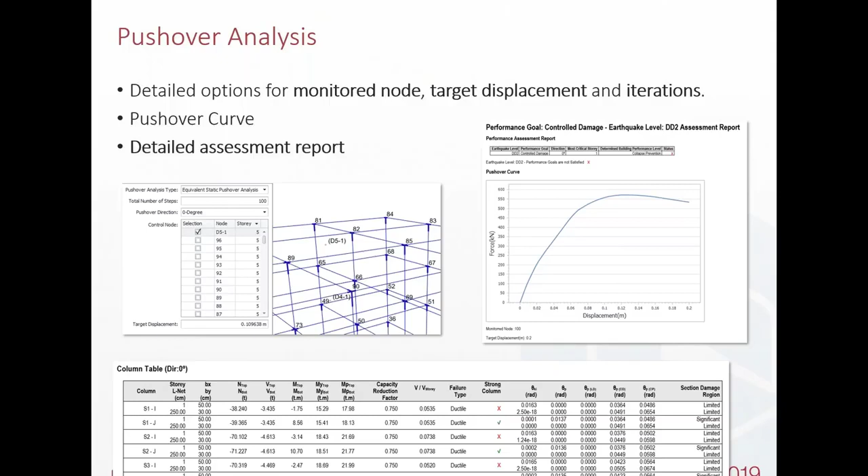That's the typical approach. For nonlinear time history analysis, first of all, the most important thing is the selection of the accelerogram, the ground motions. Depending on the building site, you have to select the appropriate ground motions which are similar to the faults near the building site in terms of fault mechanism, etc. So you have to select this appropriately.

You cannot just select a random ground motion and do the nonlinear time history analysis. The fault mechanisms and magnitudes must match your building site. Also, you cannot use a single ground motion for the time history analysis. You have to use at least 3.

Of course, these criteria differ from seismic code to seismic code. If you use at least 3 ground motions, you have to use the maximum response envelope. If you use 7 ground motions, you have to use the average response. Some earthquake codes require you to use 11 ground motions and use the average of this.

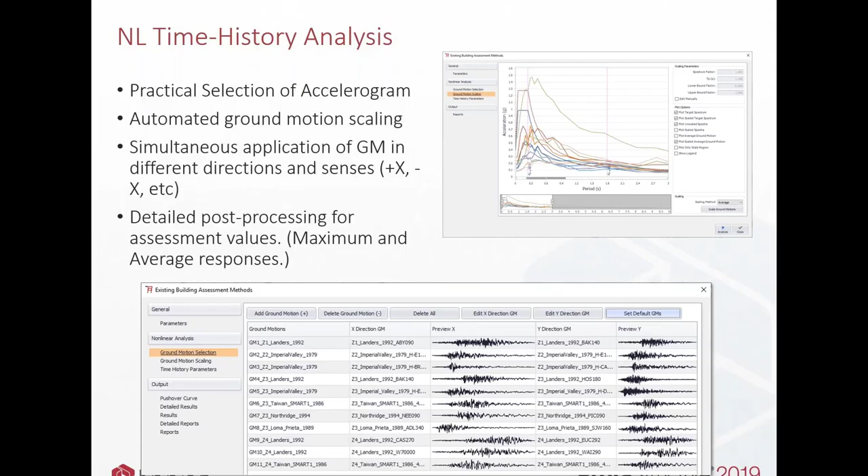I'm exhausted. As you appreciate, this is a very detailed topic, and we can talk about this for hours and hours, with lots of questions and things to remember and talk about. But what I wanted to do today is to summarize the seismic capabilities of ProtaStructure in about 1 to 1.5 hours. I tried to show some important concepts using the software itself, and I preferred to talk about it using the slides.